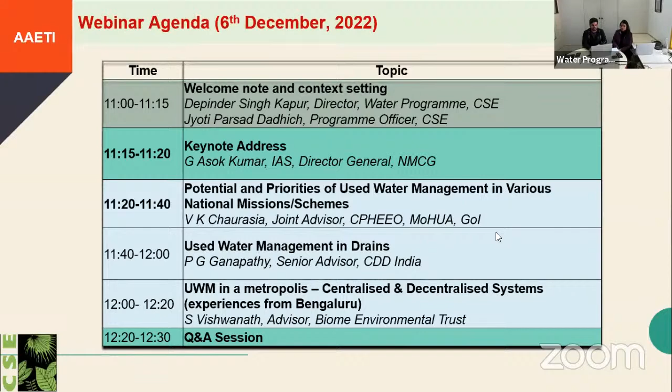This will be our today's agenda of the webinar. A keynote address will be delivered by G. Asok Kumar, Director General NMCG. Then Mr. V.K. Chaurasia will talk about potential and priorities of used water management in various national missions and schemes. Then P.G. Ganapathy will explain how we can manage used water in drains. Then S. Vishwanath from Biome Environmental Trust will talk about UWM in Metropolis, centralized and decentralized systems, some experiences from Bengaluru, Karnataka. Then we will have a question and answer session at the end of the webinar.

About the registration statistics, we have very exciting numbers. We have 650 plus registrations from 256 cities of India and some neighboring countries. We have 71% male and 29% female participants. Professionally, we have diverse backgrounds like ecologists, engineers, architects, agriculturists, lawyers, social scientists, etc. Organizationally, people are from donors, international and national NGOs, civil societies, academic background, government, academic research institutes, and private organizational consultancies.

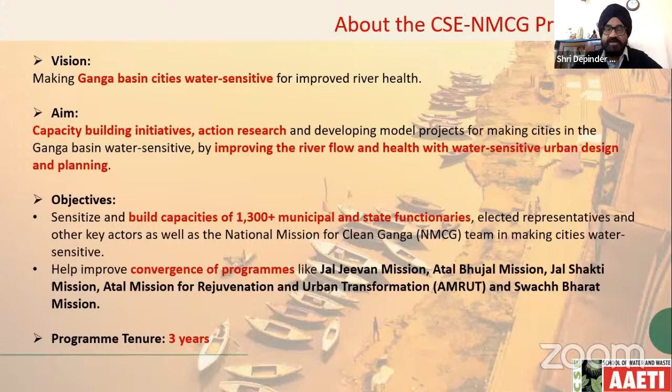So it's a 3-year program, and these are the kind of activities, 24 trainings. We have practitioners guides which we are developing on water related themes, and some of them will be out by this financial year end.

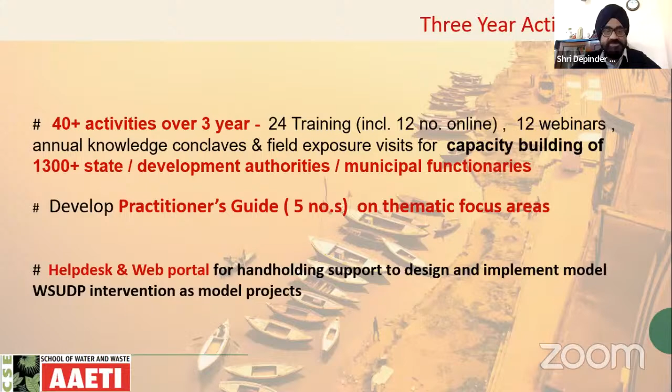So when we are talking of water sensitive urban design and planning, this is the approach we follow of water sensitive planning across various levels, from individual scale to neighborhood scale to city scale, and one can also go to the regional scale. So CSE is preparing a water sensitive cities framework, which we feel is more appropriate for global south level, and we will be preparing and sharing that shortly with you.

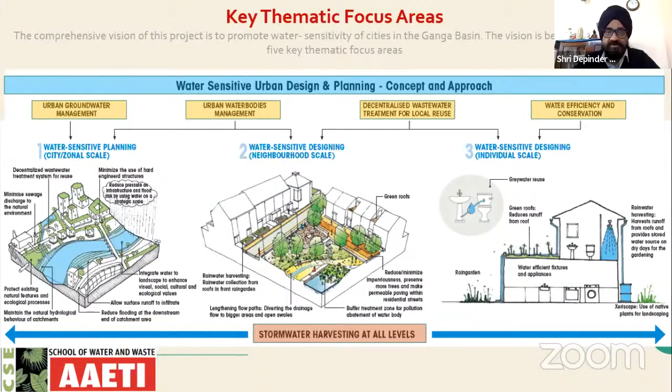Some of the work which has already been done under our collaboration with NMCG are 4 trainings, online trainings, 3 residential trainings, and exposure visits. We have also published a report on UP stormwater harvesting in parks and open water bodies. More than 1,600 officials have been trained.

These are some of the activities which are planned now and which have been completed out of the 4. Here you can see the entire focus is on water related issues, whether groundwater management, water sensitive urban design and planning, water bodies management, decentralized wastewater treatment systems, and water efficiency.

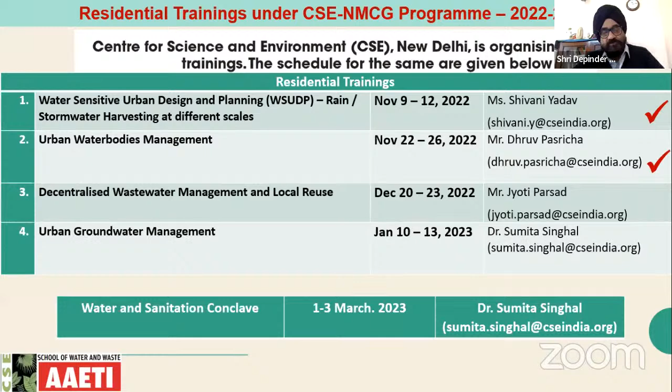So this is what is tick marked has already been done. We have 2 upcoming training programs for NMCG, these are residential, on the topics of DEWATS and urban groundwater management. And we have a water and sanitation conclave in the first week of March.

So let's discuss this topic. What is used water management? We know from the wastewater treatment scenario, which is a CPCB, Central Pollution Control Board scenario, that only about 30% of our sewage is actually treated. Even in Delhi and Mumbai, it is close to 40%. This is about a 2018 report. So partial treatment leads to pollution of rivers, and that is one of the mandates of this CSE NMCG training.

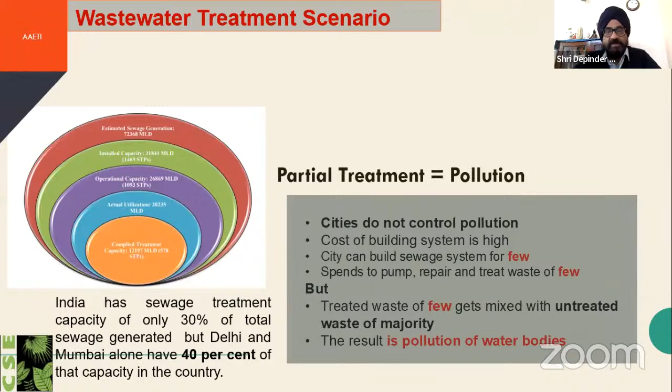If you see the scenario of Uttar Pradesh, because CSE has a program there, there are about 748 cities. The data we have, based on the census, says about 735 cities. And sewage treatment is only in about 40 cities. So where does all the wastewater go and what happens to it?

It is quite obvious there's a lot of wastewater generation. If you look at 135 LPCD as the norm for urban India, then about 100 LPCD is wastewater, partially grey water, partially sewage. But in cities which don't have a sewerage system and STPs, the entire 100 LPCD becomes wastewater.

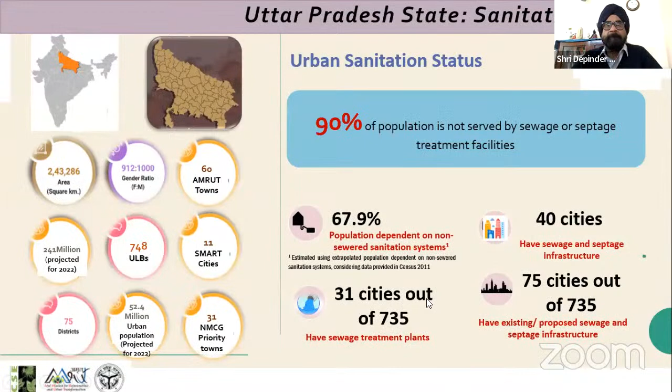So this is the kind of sewerage and STP generation in Uttar Pradesh. Only about 25% of the sewage treatment capacity complies with CPCB discharge standards. The standards are met only for about 2000 MLD as against the 8000 MLD which is generated. Mind you, this is based on water supply and sewage generation. In all our cities, including Delhi or Bangalore, there's a lot of groundwater which is used, so actual wastewater generation will be much more than what is computed from supply and sewage generation.

In Uttar Pradesh, this is the kind of scenario. We are presenting Uttar Pradesh not because it's the only state, but there is also Bihar, Uttarakhand, West Bengal, which are all NMCG states. We are presenting this one where we have a little more data. This shows what is happening in Uttar Pradesh, where about 59 towns have come up with wastewater treatment systems in recent years, on FSTPs and co-treatment.

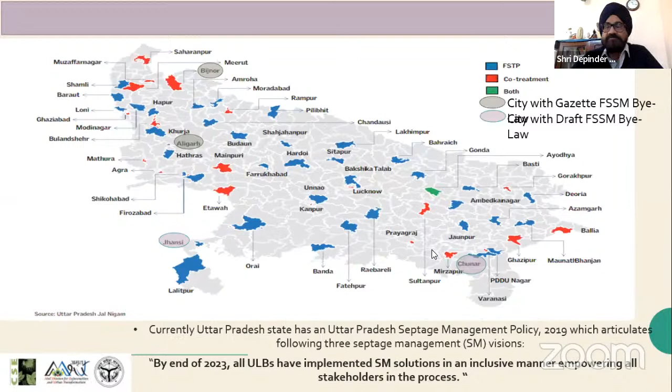So when we are talking of the framework of urban used water management, this is a kind of framework which we developed at CSE to look at used water management. I'm sure Chaurasia ji, Ganapathy and Vishwanath will certainly know more and add more to this framework. But if we are looking at a framework of understanding, then we are looking first at an assessment of the characteristics of wastewater and the quantities of wastewater. The first diagram you see in blue is assessment of the characteristics of wastewater, which is domestic wastewater and domestic plus industrial wastewater.

We are talking of water which is flowing in our nalas and streams, which we are calling used water. So we are seeing it as two types: one emerging from domestic sources, and one emerging from domestic as well as other sources, could be industrial, agriculture, whatever.

So in the domestic wastewater system, we have treatment systems of sewerage, of I&D-based STPs, which Chaurasia ji is now promoting under SBM. We also have an FSTP and decentralized wastewater treatment systems. So there are these three treatment systems for wastewater emerging from domestic sources. And for what is not just domestic but a mix of domestic and industrial, the preferred solution there is an effluent treatment plant or a central effluent treatment plant.

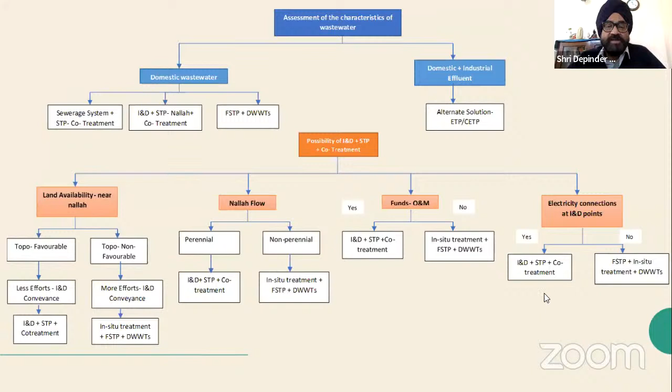If you can't tap the majority of the I&D flow, then look at other in situ treatment or FSTP and DWWTs. Similarly, there are funds and capacity issues to consider.

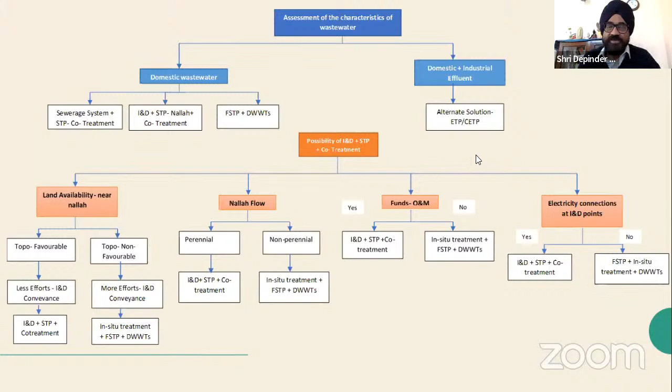Next please. So these are just introductory slides about NMCG and CSE. I will not spend too much time, but since we are having this webinar together with NMCG, we are presenting some of their work, which is a very ambitious program. You can see it spreads over these 5 states and the kind of cities it covers. Next please.

And these are the kind of massive programs and projects it has. It covers not just sewerage infrastructure, but rural sanitation, industrial pollution abatement, ghats and crematoria, river surface cleaning, biodiversity, afforestation, and public participation. Next please.

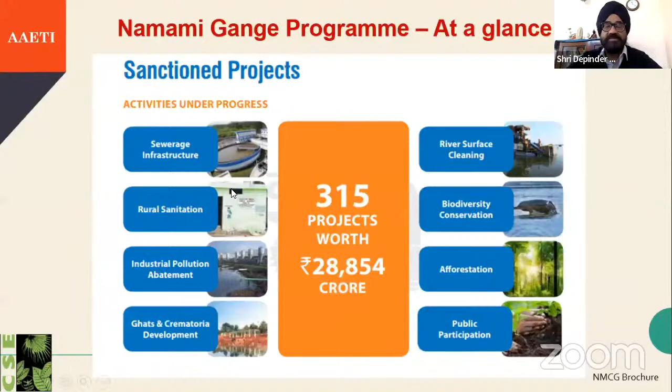So again, some of the key challenges concluding from this: the Ganga Basin has about 2,000 statutory towns, and mind you this is 2011 census data. The latest census may add a significant number of towns across these 5 states. Urban built-up area has also increased significantly.

Then there is a widening of water demand, coming primarily from agriculture but also from other sources, leading to the issue of at least some parts of the river Ganga becoming dry. And there is also an issue of overexploited aquifers.

Urban lakes and water bodies and ponds are deteriorating and being encroached, so that is also an issue. And of course there is the issue of inadequate sewage treatment, both of infrastructure as well as operations and management of existing plants.

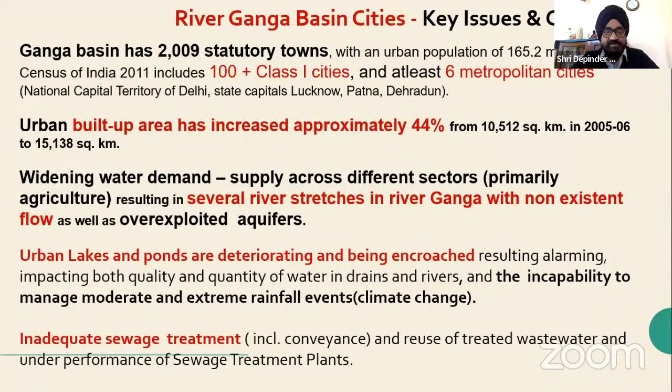Next please. So briefly about CSE—if we see one slide before, I think you missed one. Okay fine. So if you see the CSE water program, this is how it is: we have a rural program, an urban water program, and a laboratory which deals with fecal sludge management and water quality treatment.

So CSE has this kind of background. It was started in 1980 and has been awarded the Stockholm Water Prize, and has been a center of excellence working with various government programs and missions. We have 3 teams: an urban team, a rural team, and a lab team. Next please. Our focus is on action research, policy, and programming. CSE does not implement projects.

So water, wastewater, sanitation is just one of them. There is air pollution, climate change, industry, food systems. So we have various other programs and missions, in which water and wastewater is one. Plus, as I said, we have a training lab and an education program.

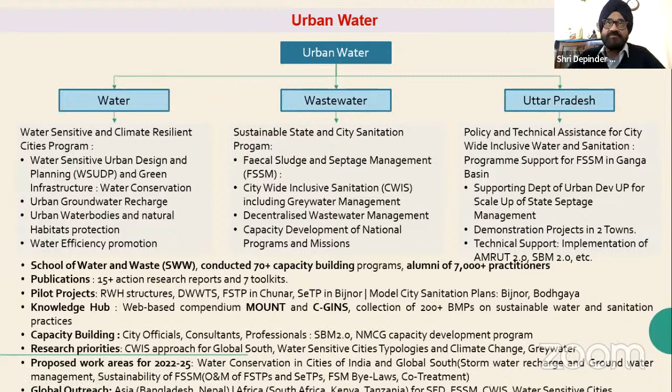We've already gone through these, some of our publications, which just shows that CSE has worked on issues both rural and urban, and from rural we have reached the urban.

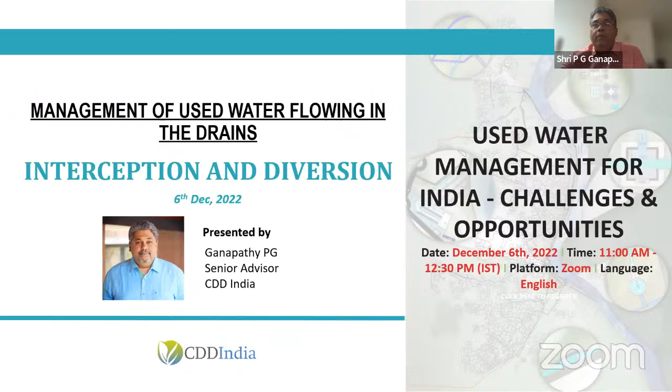Go ahead, thank you. So very good morning to all participants, and thank you, Depinder, for the nice introduction. Before I go on to the presentation I made on interception and diversion of drains, I just thought, in keeping with the topic of the event, I'll do a quick summary on opportunities and challenges, the way I see it, in a very brief fashion. Many of you, Chaurasia ji as well as yourself, have highlighted it in your speech, but this is just a summary view that I thought I'll present.

So I think there's great opportunity in reuse, as we spoke about, not only wastewater but also sludge. And I specifically want to emphasize local reuse, because one of the biggest challenges in reuse is how do you transport that water all the way to the point of use from the point of treatment. And so as long as you can close the loop at smaller scales, the reuse itself could become more economical and therefore could go up.

Water body rejuvenation, restoring our lakes and rivers to their previous pristine conditions, and particularly in this context, interception and diversion schemes, because the drains carry wastewater and they are the main pollutants for the water body. There is opportunity, I think, in looking at more passive systems or nature-based solutions, as some may call it, where there is greater sustainability in both financial as well as environmental terms, where it's possible that one uses less energy, less chemicals, and fewer moving parts, which also create a problem for maintenance.

There is great opportunity in overall cost management, looking at both capex and opex, but I'll single out opex more than capex, because capex at least can be funded by one-time programs like Swachh Bharat Mission. It may not be a bad idea to engineer systems that are not expensive in capex but match current technologies and schemes. On opex, if we can save money, sustainability is even more assured, because ULBs generally struggle more for opex, whereas capex gets funded by state and national programs. So decentralized systems, small networks, passive solutions, those involving less pumping, are all opportunities for better cost management, apart from being more sustainable technologies.

So talking about interception and diversion, I think we all would broadly agree that used water will continue to flow in our drains for maybe a couple of decades more until we have reasonably set up sewer network solutions throughout. Otherwise, septic tank overflows or untreated water will continue to flow in our drains.

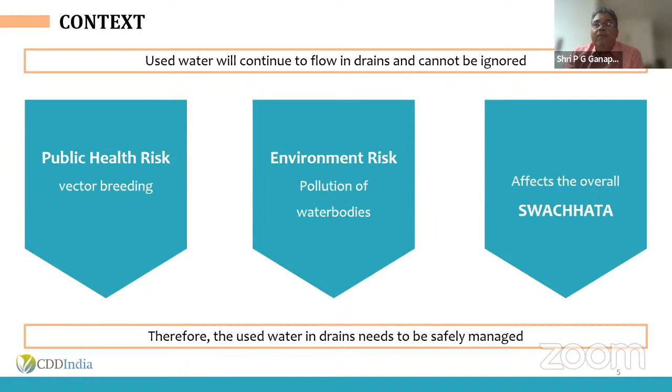These risks are well known: public health risk, environment risk, and it affects the overall aesthetics of the town. No, Swachhata, as well as there's an element of smell and the look and feel. Everything gets affected by what's happening in the drains. Therefore, it needs to be safely managed.

Goes without saying. And when you look at used water management, I think it's important to understand that there are two aspects: the quality and quantity, Q and Q as it is referred to.

There are multiple cases. There are cases where septic tank, only grey water flows, which is your bathing water, kitchen water, and so on, in drains. There are cases where septic tank overflows and grey water flows, and there are cases where there is no septic tank, no treatment, raw sewage, along with grey water flows in the drains. Each of these scenarios would create different kinds of quality and to a certain degree quantity also in the drains. In my opinion, the overall management strategy of how you manage water flowing in your drains is linked to this kind of quality and quantity.

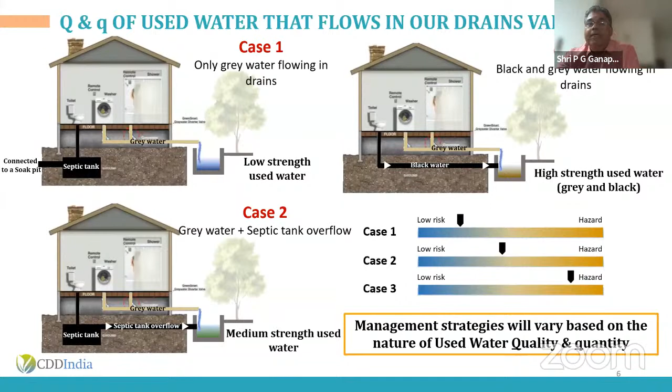What are the other key drivers of management approach of wastewater flowing in drains? As I said, quality and quantity. Then the nature of the drain itself, what's the size of the drain, the cross section, right of way, whether an open drain, closed drain, lined, unlined, would make a difference. And the nature of wet season flows, how much the drain is carrying during wet seasons, would also influence the kind of interception structure you need to build and so on.

Chaurasiji talked about level slopes and so on, while looking at treatment infrastructure. How is the overall drain characteristics? Where is the location of the STP vis-a-vis the drain and so on? And downstream characteristics in terms of the terminating water body, the quality of that water body, and what is the extent of pollution downstream from where you're treating.

But the overall objective is to mitigate pollution in the terminating water body and facilitate possibly reuse at a local level. And the management approaches based on all these factors I mentioned are going to be highly contextual. There's not going to be too many cookie cutter kind of approaches where you can cut and paste a solution. This requires far more understanding of local conditions, both technical and social conditions.

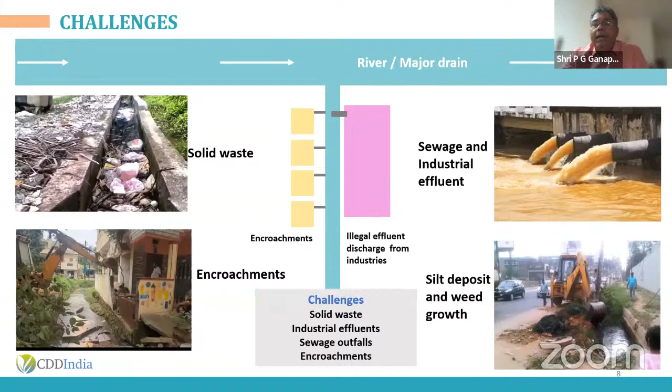Add to that challenges like solid waste, sewage effluent, industrial effluent sometimes being carried in the drains, encroachments, and silt and weed deposits and so on, which make it more complicated. So when you have this background, what are the two main approaches? One is to treat in the right of way of the drain itself, because you typically can't find land, which I refer to as inline treatment. The other is to intercept, divert, and take it to STP, which is either nearby or far away.

When you talk of inline treatment, based on our experience at CDD and whatever I've done in this area, I think we have found it quite challenging to design this in most situations, because generally there are high monsoon flows in most parts of the country. When monsoon flows are high, any kind of inline treatment would have to withstand the monsoon flows.

And when you have wide drains, maybe you can consider this. I've just put a number like greater than 6 meters, but wider the better. One can, if you're short of land, look at the land within the drain itself as a possible location for some form of treatment, minimal treatment. It also depends on the quality of wastewater being carried. If it's of low strength, it's possible to think about some kind of inline treatment.

But intercept and divert is going to be the more popular or more relevant thing to look at. But I would strongly recommend to see if we can put it in abutting sites very nearby. The longer you have to transport, the cost goes up first of all, but you may also require pumping and so on.

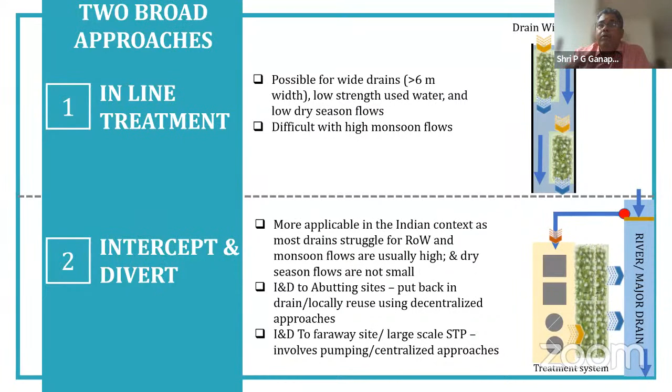These are just some pictorial representations. In the inline treatment, you could have a drain like what is shown on your right. The kind of wetland ecosystem that develops could even be a very natural one. One doesn't have to do much in the form of a constructed system there, but while designing, keeping in mind how you treat the edge, how you create a meandering flow, and so on, would help in creating an inline treatment mechanism.

When you talk about intercept and divert, you would typically intercept in such a way that dry season flows are diverted, whereas wet season flows continue straight. The dry season flows would get taken to an abutting site like an STP, and from the STP you would treat and probably put it in a water body like shown in this picture.

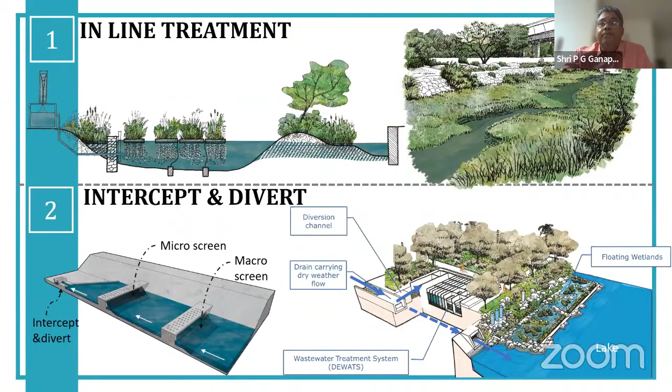So these are the kind of schemes one could imagine, for as long as wastewater is flowing in our drains. Even after wastewater stops flowing, I think these are still relevant because they could, to a certain degree, even purify stormwater and so on.

When you talk about design considerations for such a system, what we have found in our experience at CDD is that how do we handle solid waste in the drain has become the topmost challenge. Having a robust system that screens it, with a mechanism by which it is removed so it doesn't block the flow itself, is one of the most important aspects of design.

Then, of course, finding land at an appropriate topography so that you don't have to pump water is important. But even if you have to pump, there's a bit of hydraulic lift involved. If there's no other suitable location, there's no option but to intercept and pump, but a gravity flow is desirable.

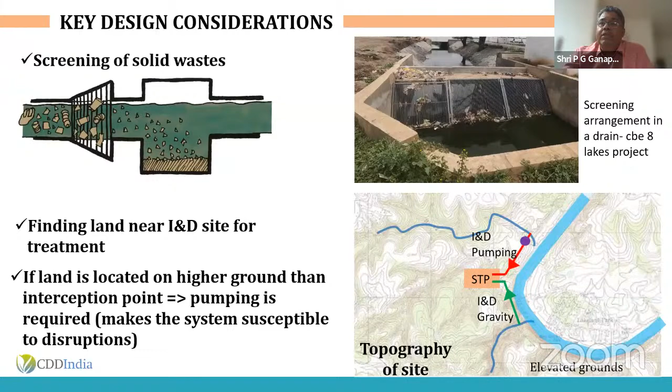The other consideration is that it should allow for monsoon flows to pass through without blocking them. So how do you create systems for that?

Then the output quality required post-treatment, before you put it back in the water body or before you reuse it, is another consideration for designing the system. The quantity and quality of flows, as I mentioned earlier, and keeping the cost low—how do you design a robust, cost-effective, and easy to operate system? These are the kind of factors that go into conceptualizing a design scheme for interception and diversion.

I won't get into further details, but let me show you some snapshots of recently implemented projects CDD has worked on. This is the Coimbatore 8 Lakes project, where under the Coimbatore Smart Cities mission, 8 lakes were rejuvenated mainly as a placemaking effort, but water management formed a reasonable portion of the overall plan. We looked at how, before water enters various lakes, it is intercepted and diverted, taken to a nearby STP as the treatment system, and then put into the lake through wetlands. That's the kind of scheme recently implemented in Coimbatore.

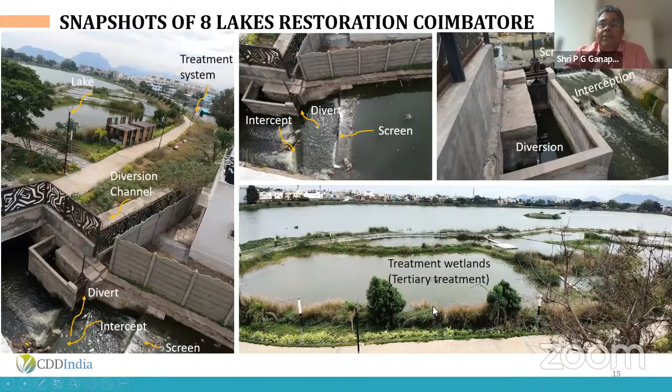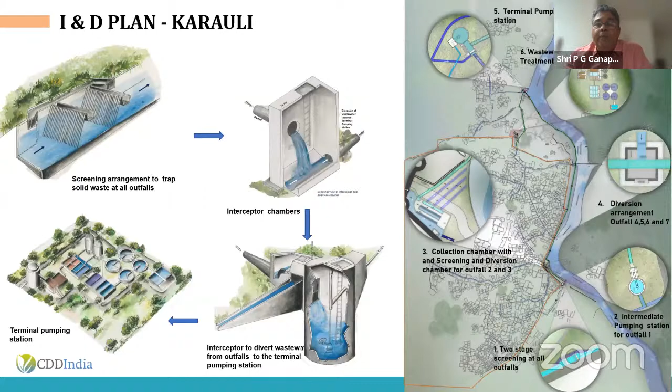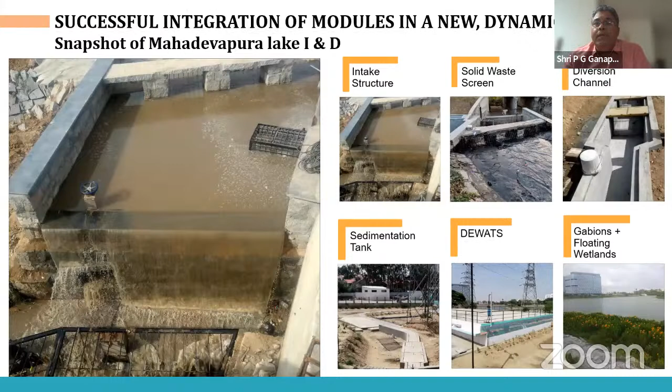This is the initial screen before water goes into the lake, and that's the interception structure you see below, from which solid waste gets screened.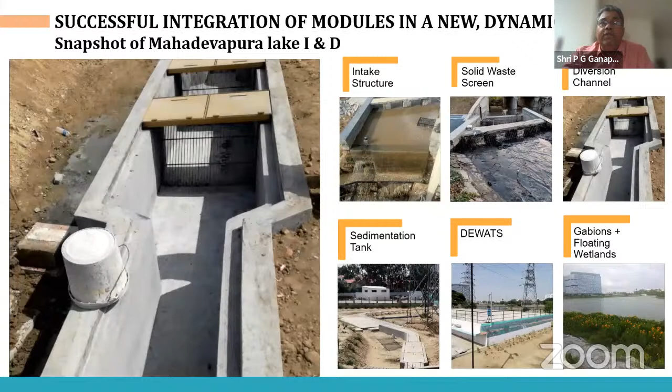The intercepted water goes through a diversion channel where further micro-level screening happens, two-stage screening, and then this whole channel takes it to a sedimentation tank, and then from there it goes into an equalization or balancing tank.

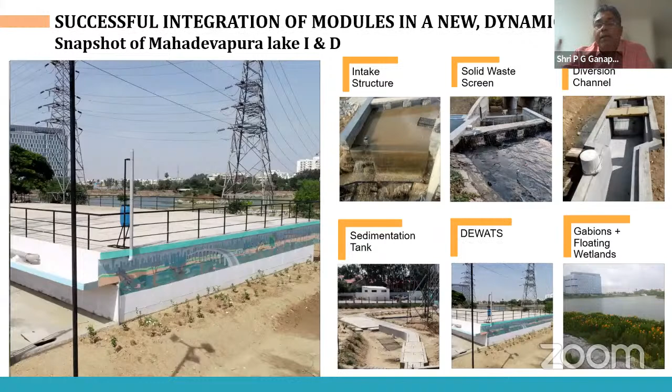Then we have a passive system in the form of DEWATS for 1 MLD. It's the largest DEWAT system built, you can say, in the world, and it's treating water and putting it into wetlands created on the edge of the lake. This is functioning quite well with very low maintenance—hardly one person is needed, and even that isn't needed except for security reasons.

One person is being maintained there. Fortunately, the pump, the hydraulics—there's no energy required for the process, but there's a small energy required to lift the water because the inlet level is below the full tank level of the lake, so we have to lift the water.

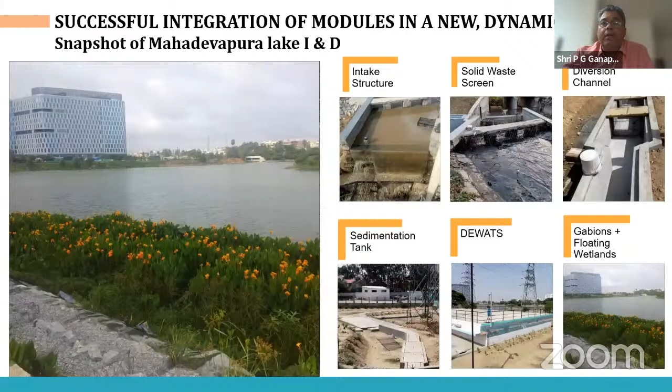Fortunately, we've been able to design a robust system with 95 to 99% availability. We've had only 3-4 days of breakdown; otherwise everything has been operating very well in this location.

Any kind of gardener or a security guy can just oversee this, clean the solid waste, open the gates, close it, and all of those things can be done. Very minimal maintenance is needed.

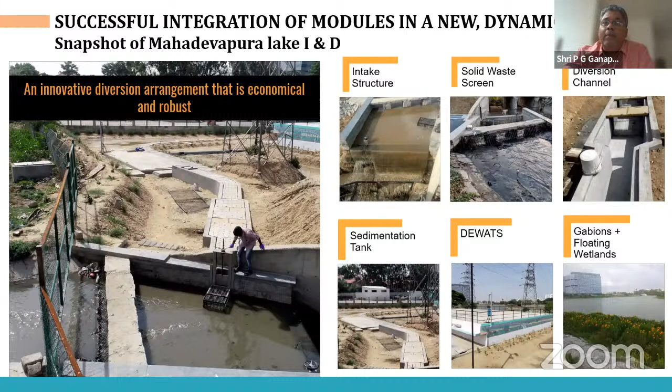So this innovation—a diversion arrangement that is economical and robust—was, I think, the hallmark of this project, apart from the large-scale 1 MLD passive system DEWATS that has also been set up.

In conclusion, in my view, I&D schemes are going to be quite important for another two decades, until we have a situation where very little used water is flowing in our drains, which may take a lot of time.

One point I want to mention is that unlike sewer systems where we design for growth—saying population is going to grow, the city is going to become bigger, and let's design to a higher size—in my view, I&D systems can be designed to the current flow, because with more sewer systems getting implemented, dry season flows will likely come down, and hopefully there'll be improvement in quality. So the systems we create today may continue to be relevant for today's volume even in the future—no need to oversize and design for a future scenario.

Inline treatment in general has been challenging. It's good to try it out only in big drains and leave it to natural wetlands to take care of it. Designing the I&D structure is very key, and it's highly contextual, based on the hydraulic levels and so on. There's no one design for an I&D structure.

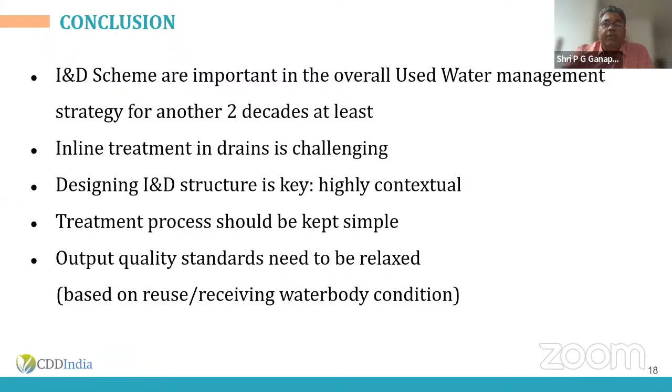So that's in summary. With that, I'll conclude my talk and would be happy to take the balance during questions. Thank you very much.

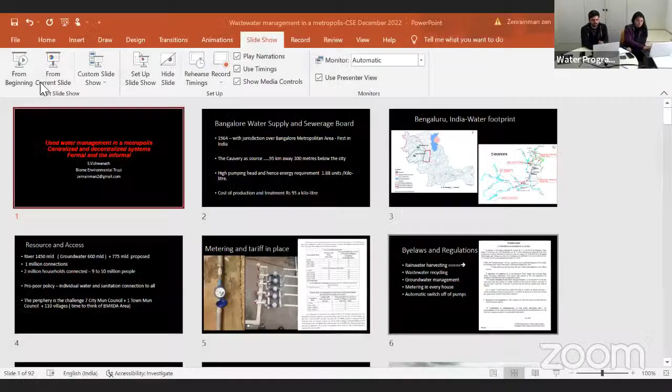I'll give a quick snapshot of both the formal and informal systems of wastewater and fecal sludge, as well as the centralized and decentralized systems which have been in operation in Bangalore city, the city where I come from, and pose the solutions that are emerging and the challenges that remain before us. It's a continuation of what Ganapathy was saying. I'll go quickly because this is full of photographs and I want to do justice within the 15-20 minutes that have been given.

One of the things we have to understand with wastewater is the robustness of the water supply system determines how much wastewater is generated. The more we know about the water supply system, the more institutional oversight, metering and tariff we have, the better understanding of the total volumes of wastewater being generated. We are lucky in Bangalore because the Bangalore Water Supply and Sewerage Board was the first specialized institution to be set up in India, as early as 1964.

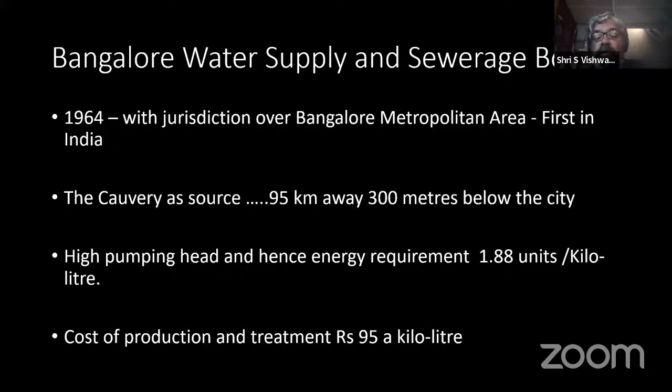The other issue that challenges Bangalore is that we get our water from 95 kilometers away, 300 meters below the city, which makes it very costly water. The cost of production, treatment and supply of water is rupees 95 a kiloliter - that's the true cost of water. And it comes from a faraway source, the Cauvery source. So the water coming into the city is very precious, and hence the wastewater generated also becomes precious.

Of the total we get into the city, we get about 1,450 million liters per day from the Cauvery River, and groundwater, which is unmeasured, is approximated at about 600 million liters per day, plus another 775 million liters will be coming into the city next year as part of the Cauvery. There are about 1 million connections of water and wastewater, and about 2 million households are connected, since every connection has 2 houses is the assumption. And so this is how it goes.

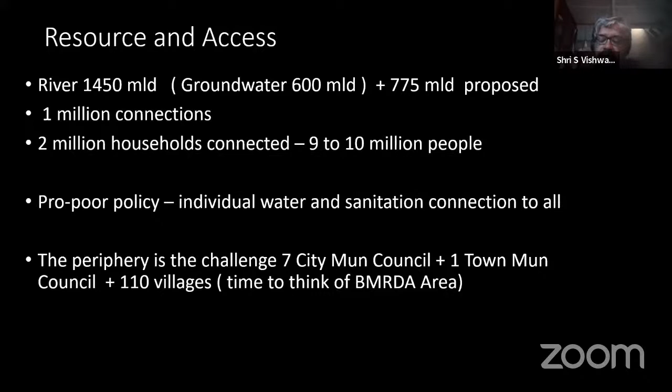As usual, it's not the city center which is the challenge, but the periphery of the city, which is the challenge for both water supply and sewage distribution.

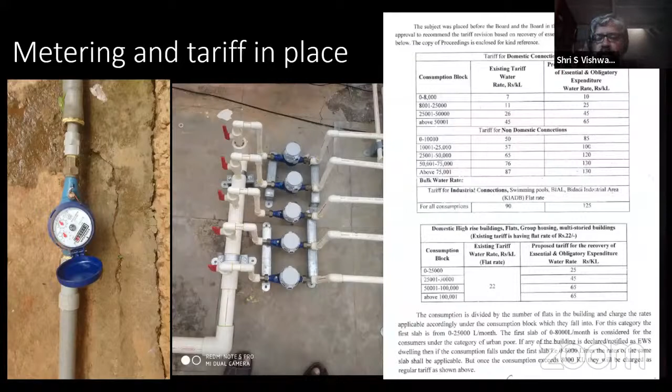We are lucky that a set of bylaws are being pushed through by the institution, which includes metering. We have a tradition of metering every connection since the 1930s in Bangalore. Recently, the BWSSB has also mandated that every flat which comes up in a set of apartments should have its own meter. And there's an increasing block tariff, which gives us some sort of a signal for demand management of water use, therefore reducing the wastewater generated.

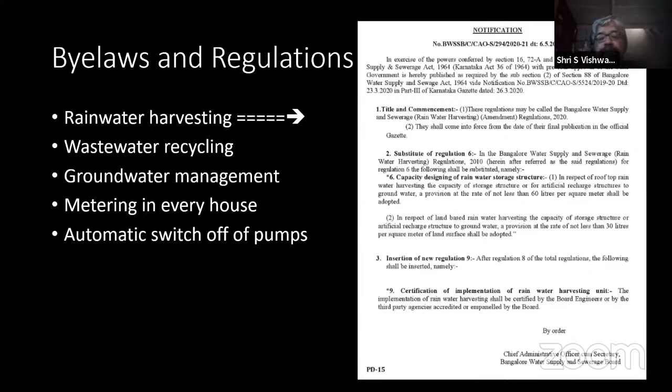The bylaws and regulations are also focused around rainwater harvesting and wastewater recycling. Rainwater harvesting is mandatory for any house more than 30 to 40 feet site, or more than 100 square meter in plinth area, and wastewater recycling is also mandatory. Any set of flats more than 20 have to have their own wastewater treatment plant, or if it's more than 10,000 square meters. Commercial buildings of 2,000 square meters and above have to have their own wastewater treatment system. So this means there are more than 3,600 decentralized wastewater treatment plants, either operational or set up in the apartments and layouts all across Bangalore.

Now, the big challenge with wastewater, both untreated and treated, is that there are claimants on this wastewater, because water is a scarce commodity and wastewater or used water is also a scarce commodity. What are the 3 big claimants?

There's an ecological and environmental claimant. That is to say, the lakes and rivers can lay claim to the treated used water because they are needed for environmental flows and ecological flows, or for the lake to be full.

Then there's an agricultural claimant, because agriculture is the dominant user of water, and this nutrient-rich used water, normally agriculturists lay claim to it. Then, of course, there's the urban and industrial reuse claimants, which are the newly emerging claims. And these have the propensity to be able to afford to pay for this water, especially industrial units can afford to pay for the treated used water, whereas ecological, environmental, and agriculture may not have the capacity to pay.

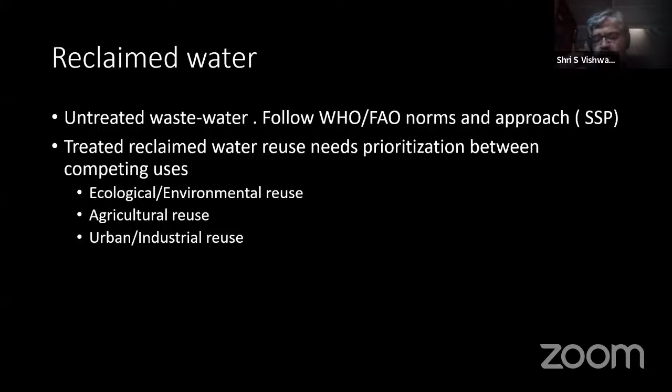So we need to work out a balance between these 3 uses for the reused water as to where it should all go. That will be the challenge before us.

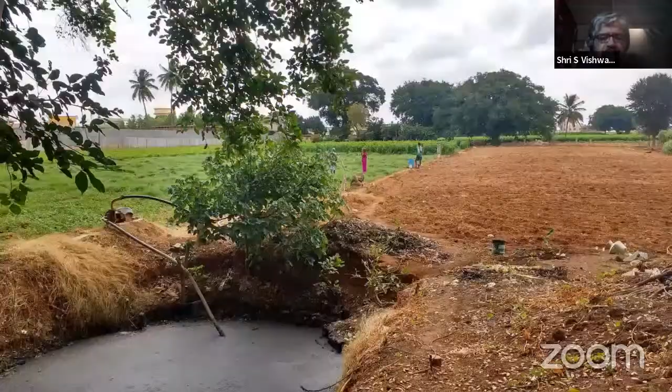As an example, just on the periphery of Bangalore, a small town of Vijaypura, population approximately 45,000, has a sewerage network in place, but no sewage treatment plant because the town simply couldn't afford it and there was no land available. And the farmer next to the town, Muniraj, picks up this untreated wastewater, mind you, which otherwise flows to the lake. He puts it in what you would call a small settling tank.

Now he's created a second oxidation tank. He puts it into that, the farmer. And this is representative of all farmers, about 60 of them close to the town of Vijaypura. And then he pumps this treated wastewater onto his field. This is how the pumping is done. And you can see a crop growing behind him.

He practices furrow irrigation. He's now going into drip irrigation also. The furrow irrigation means that the workers of the field are not in direct contact with the sewage. And the sewage is used to grow a particular crop, mulberry, which is a non-edible crop. This is important because when you grow a non-edible crop, the crop does not enter the food chain. So it goes out of the food chain.

So you de-risk consumers of this used water you reuse. So mulberry is grown, and this is a favorite of mine because this mulberry is a perennial crop. It grows throughout the year, and it grows extensively in the surrounding areas. And all the used water which is generated from Vijaypura is consumed by this land.

This mulberry leaf is then used to feed the silkworm. The silkworms are very sensitive creatures. They do 2 jobs here. They're functional, growing to get cocoons, but at the same time, they're also a bioindicator of the quality of the leaf, which is fertilized with untreated wastewater. So they're sending both these signals.

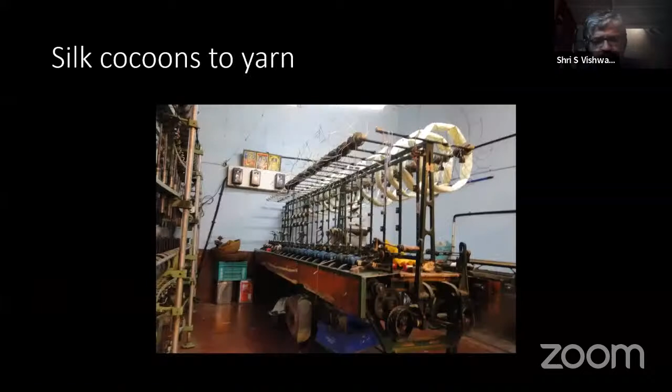And these cocoons then are developed through the eating of the mulberry leaves. These silk cocoons grow, they're turned into yarn in the same town of Vijaypura, and then they're spun into saris. So you have taken shit and converted it to silk, untreated wastewater to silk.

The likelihood is that the town of Vijaypura is unlikely to get a sewage treatment plant in the near future. Even if it gets an FSTP, it's not going to deal with this, because there's a sewage network in place and sewage is being generated. So FSTPs are not able to manage this.

So how can we then engage with this practice of the farmer? Can we engage with it formally and try to minimize the health risk and environmental risk, so that this livelihood continues, and wastewater is converted to a source of livelihood and productive use?

For which there is the sanitation safety plan, a template developed by the World Health Organization, which looks not at a standards approach, but a risk approach, and then tries to see how risk can be identified at points of contact and then minimized or de-risked.

For example, as I was mentioning, if you grow a non-edible crop, you have de-risked consumers. If you do furrow irrigation or drip irrigation, you de-risk the farm worker, and so on and so forth. If you grow mulberry, then it consumes all the wastewater and doesn't allow it to percolate below 1 foot. So therefore, it de-risks the groundwater from contamination.

So would India also want to work with these kind of processes using the sanitation safety plan, till we get all our FSTPs and STPs in place, till all the sewage is collected and treated adequately? Because it will take some time for that to happen. And in that meantime, how do we engage with the risks that are being generated by used water? That's a question that I ask you.

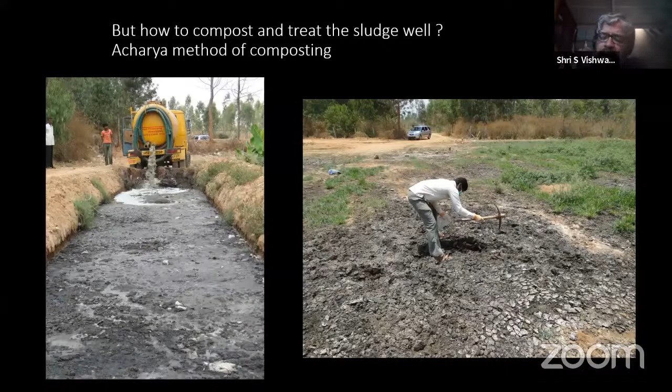It's the same with the honeysuckers. A lot of honeysuckers are able to take the waste from pit toilets and septic tanks to FSTPs, but a lot of them are also taken to farms, put into composting, like the Acharya method of composting. This compost has a resale value, and it's used with farmyard manure to grow fruits like bananas and grapes. Can we use the sanitation safety plan to understand the risks posed by this kind of use and try to mitigate it, but at the same time take the farmers as partners as part of the solution-seeking space? It's a question that I asked.

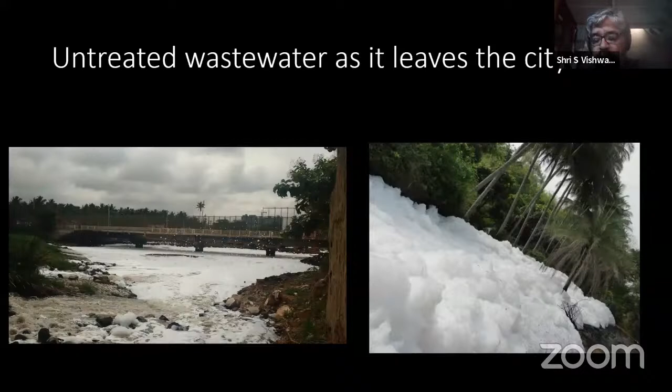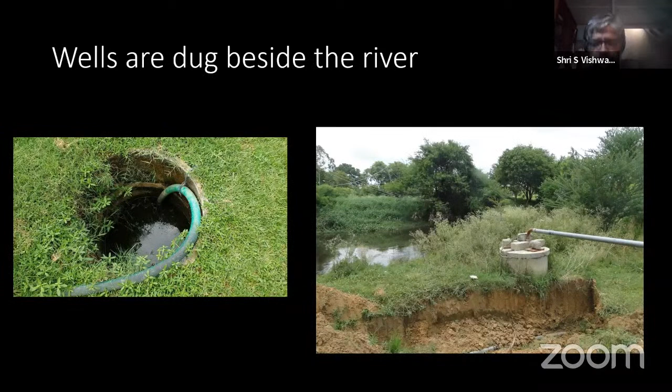This is how the untreated wastewater looks, or used to look, when it flowed out of the Bellandur and Varthur Lake, full and foaming. But about 5 kilometers away, nature starts to do its job, and you don't see the froth and foam. What you see is farmers digging small wells next to the river stream itself, allowing the filtered water from the Dakshin Pinakini to come in, and as you can see on the right, they're putting up pumping stations, sometimes pumping it 7 to 22 kilometers away.

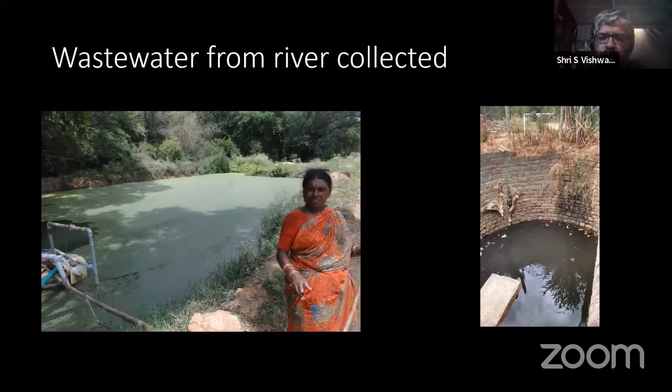So if you ask farmers what they want, they say please stop industrial effluents coming into the wastewater, we don't want heavy metals. They are perturbed about flows, they want assured flows. They want advice on crop choice for the market - which crops should they grow - and advice on irrigation practice. Can they treat this untreated wastewater on their farm plots and improve it? On-farm treatment and improvement.

Now, farmers are putting in 40, 50 lakh rupees to take this water and use it for irrigation and cultivation. Do we recognize this as a practice which encourages livelihoods? And how do we engage with it? Which institution will engage with these farmers to try and help them improve their practice so that consumers are safe, they are safe, the farm workers are safe, and the environment is safe? That's one question we want to ask.

So in the process of formalization of this informal use, what Bangalore has done is actually decentralize its sewage treatment plants. The city will have 55 sewage treatment plants, typically now of the size of 15 to 40 million liters per day, in each one of the valleys that permeate the city itself. So 55 sewage treatment plants is a form of decentralization, which is fascinating to see how centralized systems are working.

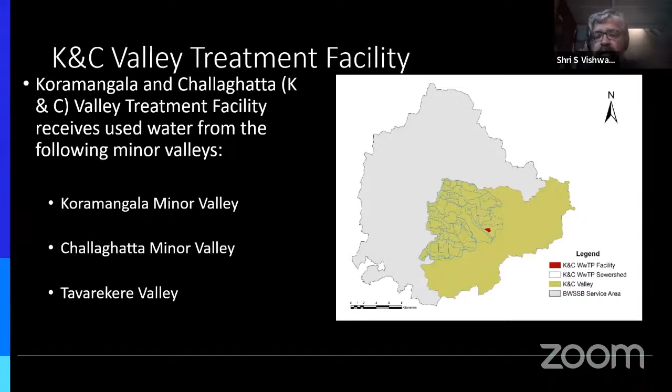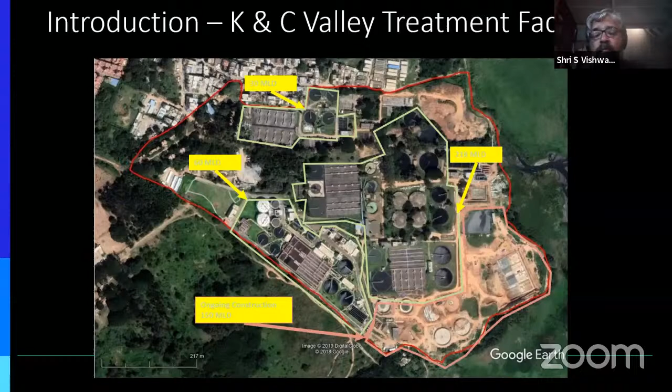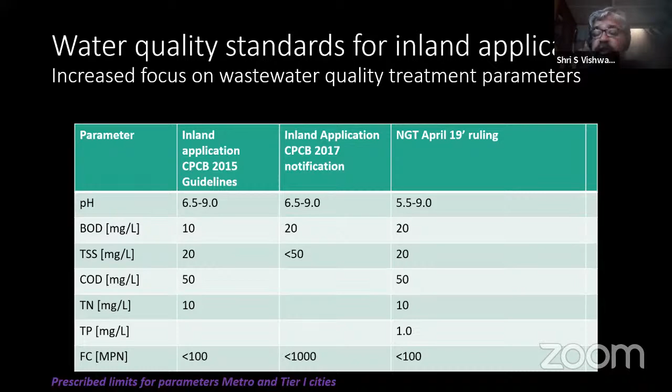And what it does - I'll pick one of these valleys, the KC Valley treatment plant. There's a treatment plant there which you can see. This is how the sewage treatment plants have been coming up over the years, over decades, because as the flows increase, newer and newer sewage treatment plants are being set up. So there's an assemblage of sewage treatment plants. They are now trying to match the NGT ruling and meet up with standards. A huge investment is going into upgrading the standards, especially reducing phosphorus and reducing total nitrogen to less than 10. Then they start to meet the standards used for reused water, which is for non-potable use, about 440 million liters per day.

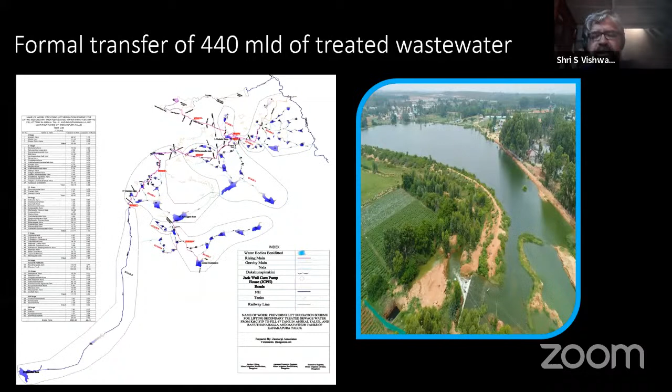Now it's increased to 1,200 million liters per day of treated wastewater from the city being shipped out to fill the lakes and tanks surrounding the city. It's pumped about 42 kilometers to fill lakes in the neighboring districts of Kolar, Chikballapur, and Anekal, which are drought-affected and climate change-affected districts. Many of the lakes there are being filled with the treated used water from Bangalore.

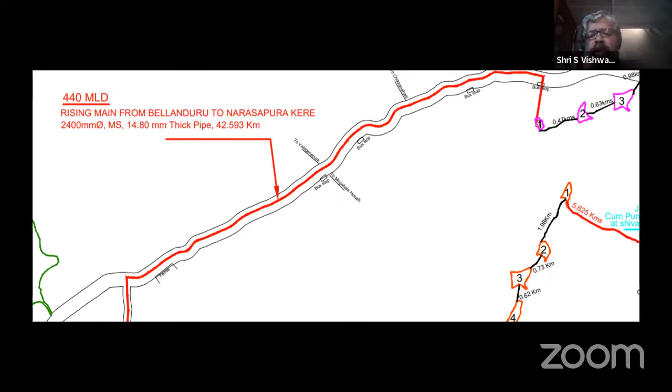This is one of the first pumping stations. This is a rising main, about 42 kilometers, but this is the only height to which it is pumped, more or less, because from there it cascades down by gravity, then is lifted up barely a few meters and allowed to cascade down again. So it's filling 137 lakes and tanks.

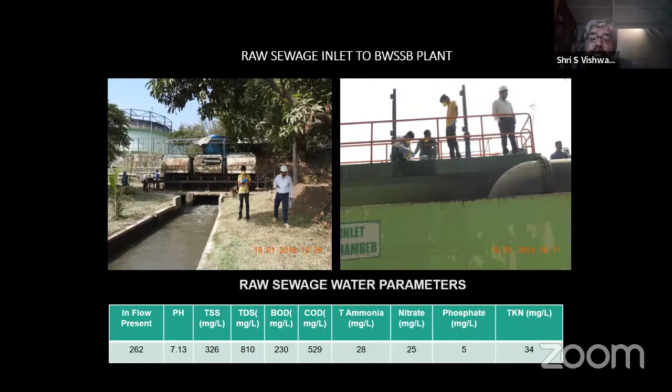Here are the decentralized sewage treatment plants of Bangalore. You monitor the raw sewage parameters of the inflow quality - BOD, COD, phosphorus, and nitrates - and treat them to whatever standard is set by the NGT or CPCB. You treat it to those adequate standards, then ship it through this rising main to the first lake, called Lakshmi Sagara.

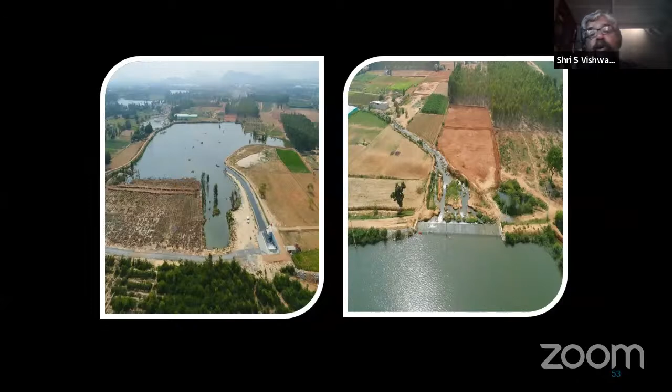Here the treated wastewater is coming into the lake. This is how the lakes are filled, and the first lake itself has fisheries growing in it. The water cascades down and improves in quality as it goes down the lake. Now it's changing the whole environment of the place because this water is available 365 days a year. The biodiversity is changing, groundwater levels are coming up, and farmers now have an assured water supply for livelihoods 365 days a year.

Treated used water from Bangalore is providing livelihoods to about 64,000 farmers. In turn, the farmers grow food and the city gets food security. In an era of climate change, used water is now precious, and the city is imagining itself as a water and fertilizer factory, as pointed out by others. So is this the way of the future? Because then many lakes can be rejuvenated.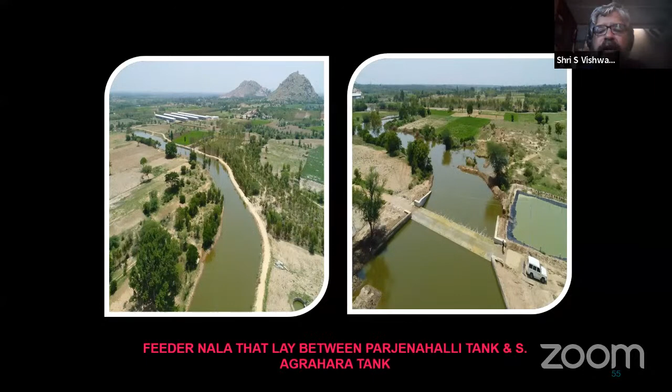The overall goal is to rejuvenate 1,000 lakes around the city of Bangalore, as you can see in some of these photographs. Now these waters in the lakes are auctioned by the Gram Panchayat. The fisheries people have to pay money, so the Gram Panchayat starts to earn revenue, and fish are grown in these lakes, with revenue going to the local government.

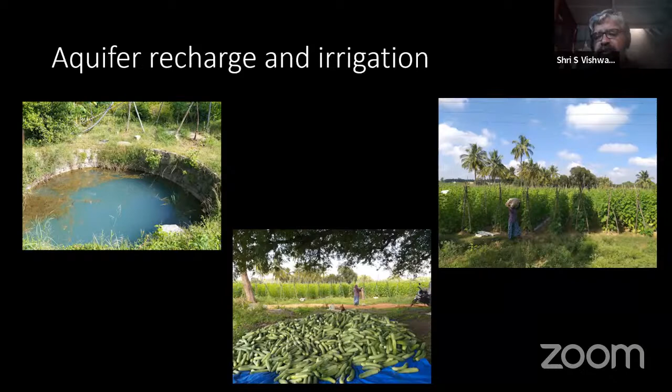The water is not allowed to be used directly - it recharges the aquifer. Open wells are now filling up, and people are using drip irrigation systems to grow all sorts of vegetables and crops. This is being monitored by a team from the Indian Institute of Science. As you can see, farmers are now using drip irrigation systems, and they've returned back to the land to grow crops.

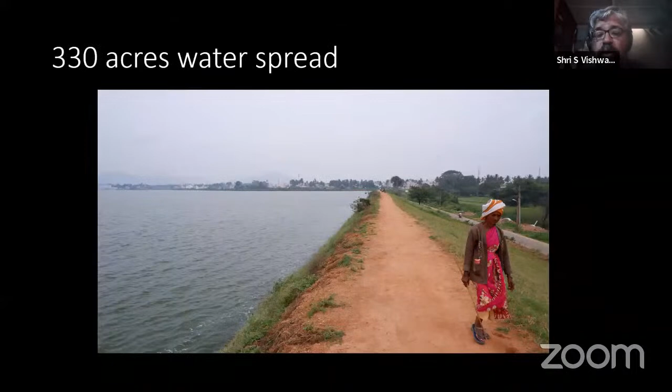Not only is the used water supporting farmers, but the surrounding towns of Kolar and Chikballapur, about 60 kilometers away, also have lakes getting filled up. This is next to Chikballapur, a huge 134-hectare water spread filled with treated used water and rainwater. It's recharging the groundwater here, and the wells in these towns of Kolar and Chikballapur are coming back to life. This well water is currently being used for non-potable purposes.

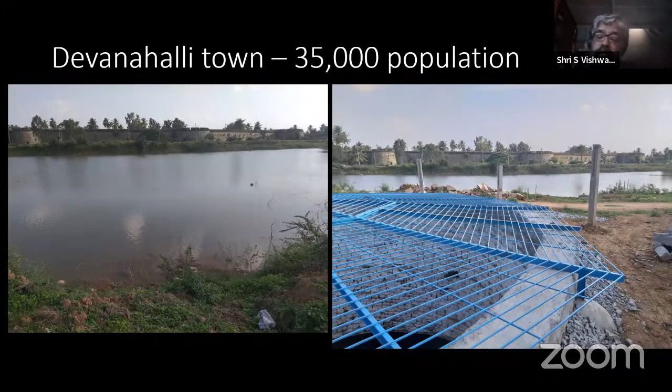The question is what water treatment plants would be needed to make sure this can be reintegrated with the drinking water supply. So used water from a metropolis is supporting the water supply of smaller towns, Kolar and Chikballapur, like this one in Devanahalli, which is also being used there.

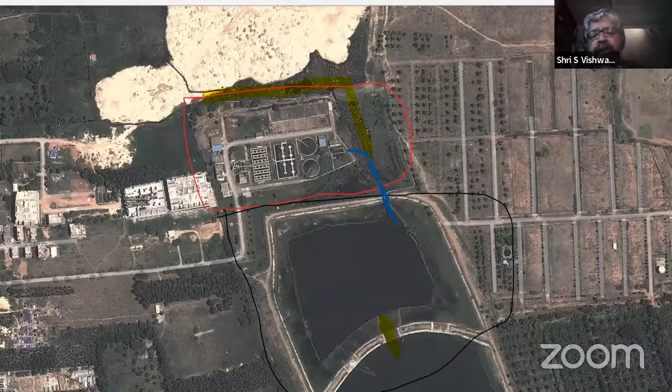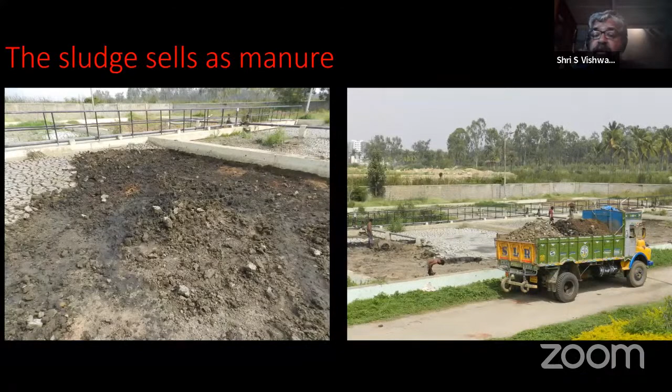There are also ecological uses of treated used water, as shown in this example from Jakkur Lake, a long-standing case where a 15 MLD wastewater treatment plant, marked in red, is situated upstream of the lake. All the wastewater is picked up there, and the sludge from this treatment plant is also used as a soil conditioner, taken by farmers paying 10,000 to 12,000 rupees a truckload. There's no heavy metal in it, and the treated used water is then led into a wetland, which supports biodiversity, like the weaver's bird you see here, and the wetland polishes the water.

It comes into the lake. The lake is always full throughout the year, and it provides livelihoods for fisheries. Fish is cultivated here.

It's proteins for the city and livelihoods for the fisher cooperative, and the bird biodiversity increases, so it enhances biodiversity. Now, used water is becoming a livelihood creator and a biodiversity creator. Not only that, it recharges the aquifer, and this becomes drinking water. Without the yuck factor, this one well can yield 1 lakh liters of water. Overall, the lake is recharging 7 to 7.5 million liters per day. So this is what's happening now.

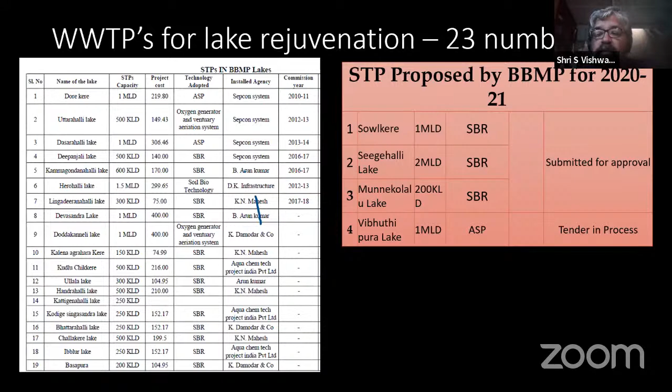And as Mr. Ganpati was showing, lakes are now getting smaller STPs. The challenge is how do you keep these STPs running and functional and make sure that treated wastewater is used to fill up these tanks and lakes. So there will be about 23 such smaller sewage treatment plants like this one in Cubbon Park, which picks up treated wastewater and uses it for the gardens and public there.

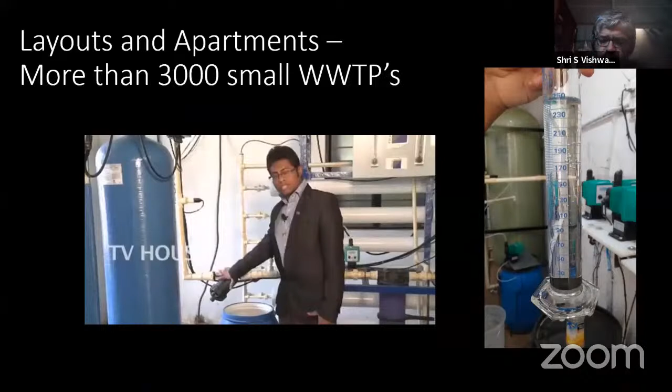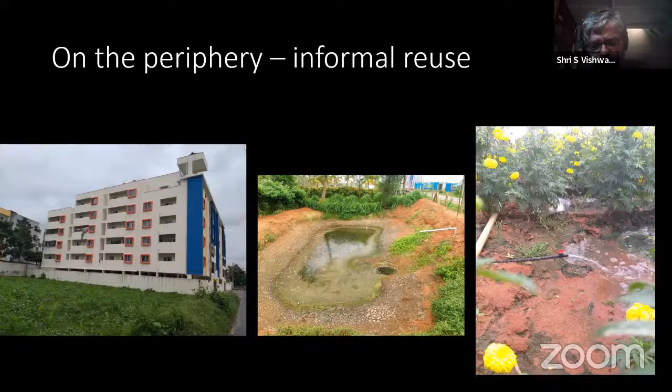Layouts and apartments now are putting up smaller wastewater treatment plants like this one here, 3,000 or more small wastewater treatment plants. On the periphery, there is an informal reuse like this in this building. Farmers pick it up from the septic tank or the wastewater treatment plant, and then they use it to grow marigold, for example. Farmers are loving the nutrient value. Do we recognize this practice and try to encourage it or discourage it is the question we have to ask, but it's providing a lot of livelihoods.

And the formal decentralized systems range from the Phytorid or nature-based solutions, like this one in this gated community, to the more traditional ones. This is the Phytorid system set up by NEERI in this particular place called Rainbow Drive. And in this apartment called TZ, they're using a membrane-based system. As you can see, there's a sand filter, activated carbon filter, ozonizer, and an RO system. And what you see on the right is the then chairman of the Pollution Control Board actually drinking this treated wastewater. So this is the first set of apartments that I know of in India which blends it with groundwater and actually drinks the treated used water. So this is the brave new world that's being entered.

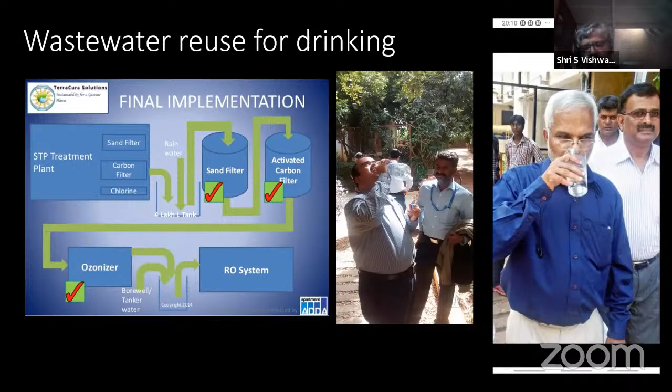So from the formal, informal, where untreated wastewater is being used to cultivate marigold, to the formal, where it's being used for drinking purposes, that's what there is.

So what are the key challenges in the decentralized system? Reuse within apartments is very difficult to achieve. There's a question of overproduction of treated used water. So only 20% of it is used for flushing toilets, and a lot of it remains, so then it's sent into the stormwater drains.

The technology choice is a difficult one to make. The builder wants to minimize on cost. The residents association then has to run it, and how you handle that will become crucial. Performance consistency is very important. People hesitate to use treated used water, even for flushing, if there's a smell, even for 1 or 2 days. So therefore, you need to be consistent, without any smell, and with the treatment. That's a huge challenge. The human resource power needed for running these treatment plants needs a lot more skill upgradation and basing. And sludge is virtually unmanaged.

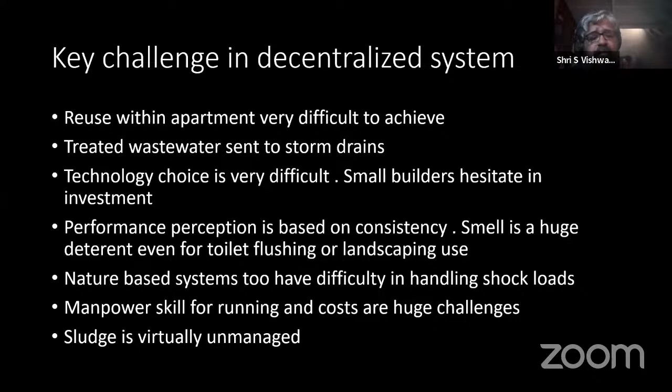So, but at a city scale, we can imagine that decentralization by the city itself can help service the hinterland. It can provide livelihoods. It can provide climate change security. It can provide food security for the city itself, and it can enhance the biodiversity that is there. So a lot of cities and towns in peninsular India can imagine themselves as water and fertilizer factories.

The World Health Organization sanitation safety plan needs a huge relook. We need to figure out which institution will champion the sanitation safety plan and de-risk the reuse of used water and sludge. That's how it goes. And we need to prioritize between ecological, agricultural, and economic and urban uses. Fit-for-purpose standards need to emerge based on what the water is ultimately going to be used for, not just one standard for all over India.

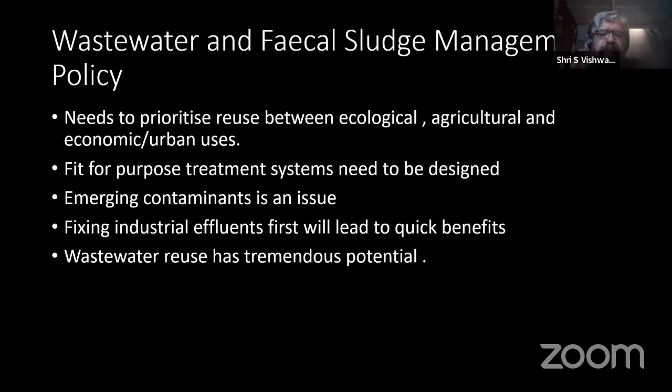Emerging contaminants is an issue. We need to keep a tab on that. And fixing industrial effluent, separating it from domestic sewage, will be of great benefit. And of course, wastewater reuse has tremendous potential. Thank you for your time. This is all I wanted to share with you.

Thank you very much, Vishwanath. Those points are very well made, that the benefits are not just reuse, but social, environmental, and cultural as well as economic aspects, both agriculture and others. These slides you shared, I remembered ones I'd seen earlier. The water supply from Kaveri was around 60 rupees, now it has gone to 95 rupees per kiloliter. I think it's very good that you're pursuing this data and presenting it so well for a national and global audience.

I would like to now open it up for questions and answers, and responses. Sir, we have a few questions in the question and answer section. I saw those, but they are a little generic. If there is any particular question you have picked up, you can mention it, or people can raise their hand and we will unmute them so they can speak up. Yes, that will be better - just a question, not detailed comments.